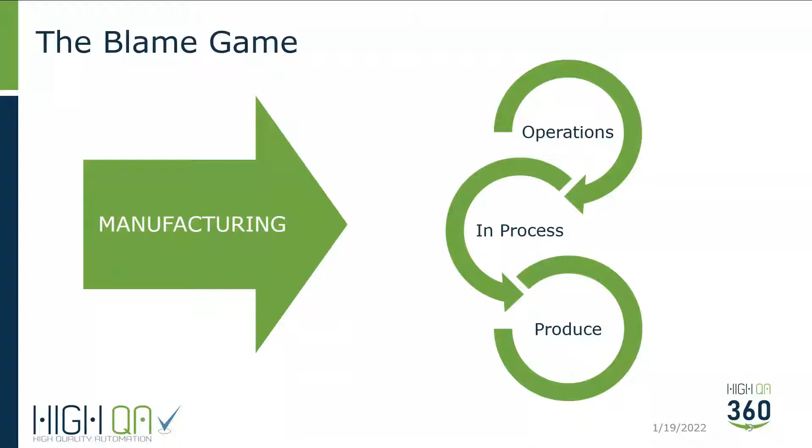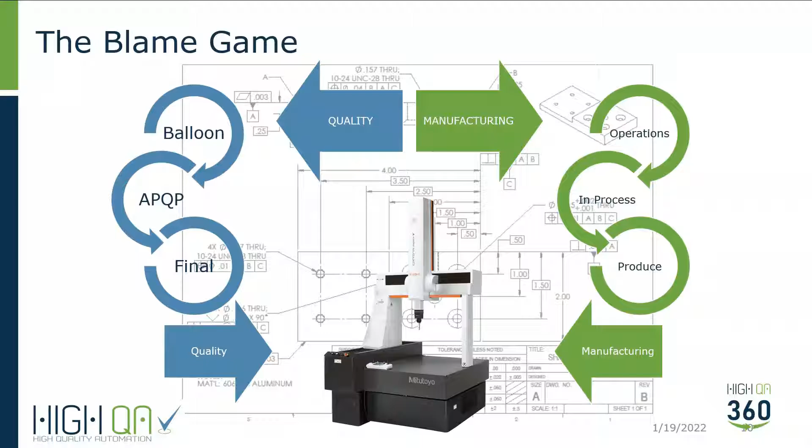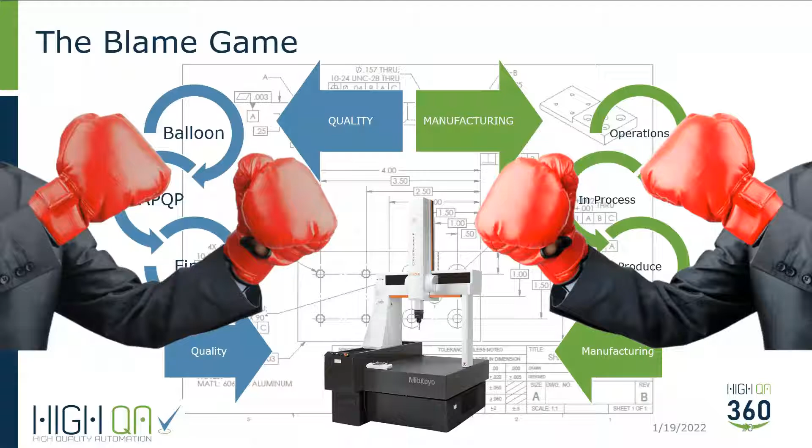But now that the process is outlined and set up, the parts are produced and measured during the process. But then what happens? Well, in our not so made up scenario, the first time quality and manufacturing actually come together isn't until the part has already been measured on the CMM, long after the parts are made and measured in process. And sometimes this produces some potentially heated discussions between those who made the part and those who checked the part. But we find the biggest issue some of our customers have is collaboration between departments, or lack thereof.

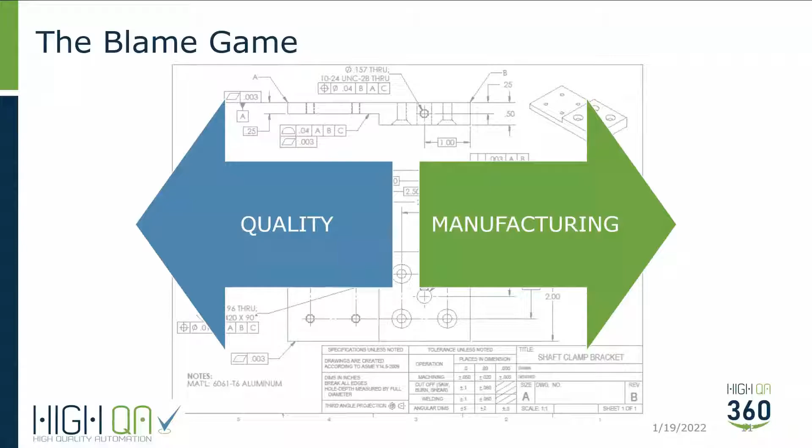What if we could take this scenario and rewrite the process? Let's start with that very same print. The same processes need to be done, right? Only now, as it works its way through the company, the digital thread is staying intact because everyone from manufacturing and quality are working on the same exact information.

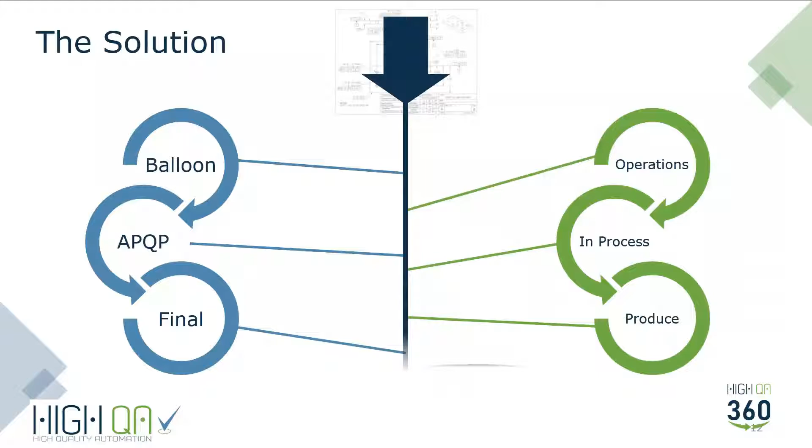The ballooning identifies all the engineering characteristics. Manufacturing identifies all the operations. In-process checks are identified. Data is acquired both on the shop floor and in the quality lab. All the inspection results are compiled into a final inspection report, and a complete submission package is created. Now, this translates into increased transparency within your company and ultimately drastically improved lead times.

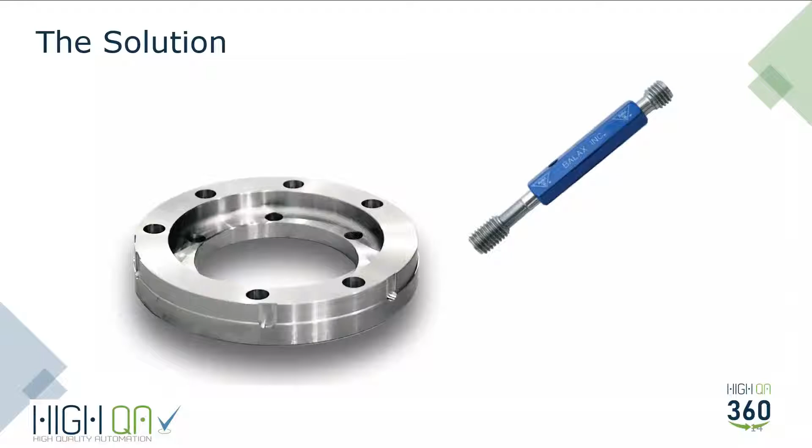Here's one more quick scenario. Let's say you make this part. And let's say these 3 holes here are threaded and finished in the machine in op 30. So the machinist is going to use a calibrated thread gauge to check the holes after they're finished in op 30. Now, most companies will recheck the thread at final inspection. But why? Why not use the data from the machinist on the shop floor who inspected it the first time?

Now, some companies decide to treat the final inspection as a double check, to make sure the thread is good and there's no burrs or anything on it, and that's fine, no problem. But for other companies, the process of measuring something in final inspection that's already been measured on the shop floor is time wasted, and it increases the time the part is in final inspection.

So how do we do that? How do we break the bottleneck to get parts out the door faster without compromising quality? Well, the answer is simple yet commonly overlooked. The process needs to be automated. But when people think about automating a process, visions of robots and auto-load CNCs are usually high on the list. And why shouldn't they be? By some estimations, it increases throughput by up to 4 times. But why has so much attention gone into manufacturing for automation without addressing the true bottleneck, the quality documentation process?

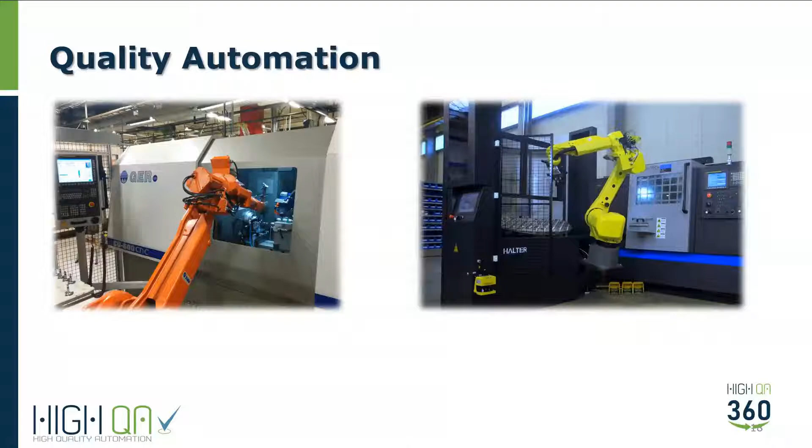So at HighQA, we help to streamline and automate your quality process. Now, this is usually done in 3 phases. We have the planning phase, the production phase, and the reporting and submission phase. Now, for the rest of this webinar, we're going to be primarily focused on the production phase. But as a side note, when we get into the software in just a minute, we're going to be gathering some data and then compiling it into a first article report. We will not be getting into the APQP documentation automation that's available in the software.

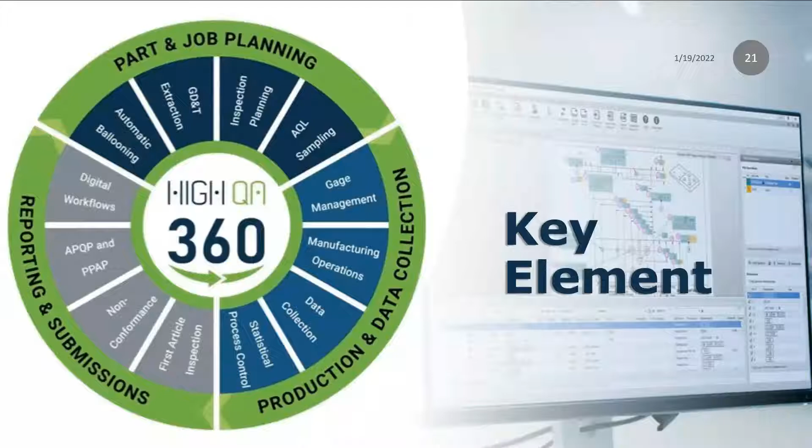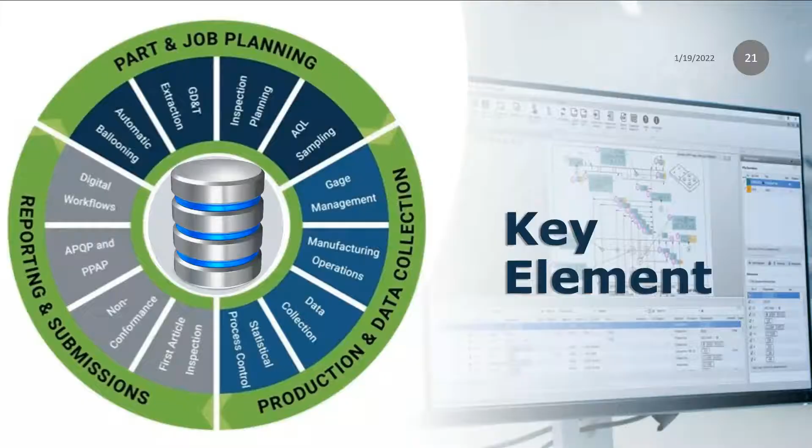But we can never get very far in a presentation without talking about one of our key advantages. That's the database. All the information you're about to see is securely stored in a database on your secured server on your network, and it's available real time across departments. So this is not a cloud-based solution, so you won't have to worry about your data security. It's all kept internally. So let's jump into the software and see how easy shop floor data collection can be.

So for this part, we're going to jump into the software and step you through the process of how you would actually do this at your facility. And it all starts with the planning phase. We can't get into production without part planning. So we're going to just simply open a new drawing.

We have a sample drawing here that we use. And once that opens, you can see this is a PDF. Now we can use any pictorial-based drawing, a PDF, a TIFF, a JPEG, or whatever really you have that's a picture type drawing. Additionally, we do have the functionality to bring in a 3D model with the PMI data. So we have that as well. But from here, it's just a regular 2D print,

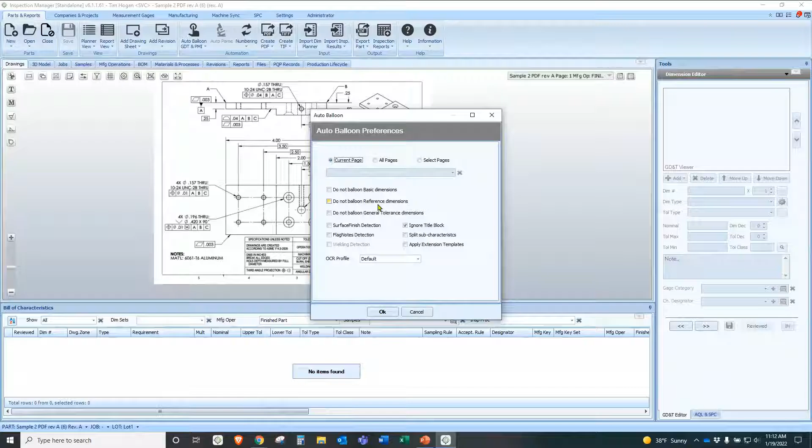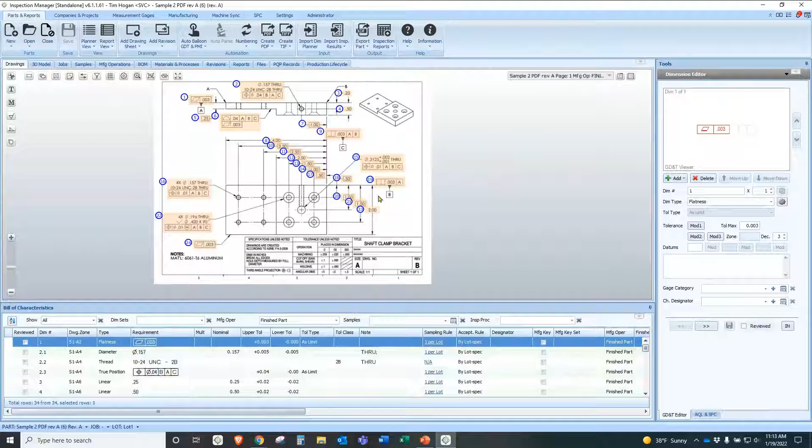nothing special about it. We're going to click on our auto balloon button, our single click auto balloon. There are options here for multiple pages, and you can turn off basic and reference. But for this case, in this demonstration, we'll just hit OK and let it run through the process. Now the proprietary OCR takes over, optical character recognition. And it's looking at this print, specifying what is a GD&T and what are dimensions, and analyzing that entire thing. So you can see that took about 15 seconds, and the entire print is now ballooned.

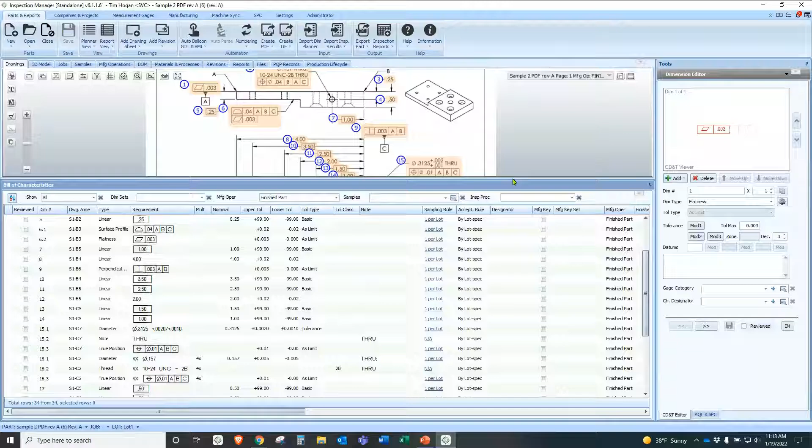But even more importantly, if I look down here in what we call our bill of characteristics, all the information has already been extracted and populated in the database. This is all in the database real time. Nominal information, tolerances, the characteristic themselves, what it is, the drawing zone that the dimension is located in. All that information was all extracted in that first 15 seconds.

So now we have our information, and we can also acquire additional information off the print. For example, here's our material. We can come over here and click our material button and simply select it by box selecting it like this. And if we look to the right over here, we can see that our material has now been populated. We can click on our little pencil right here and add additional information like material codes, spec numbers, cert numbers, supplier list. There's a pull down for that, and you can add a supplier just by simply clicking this add new.

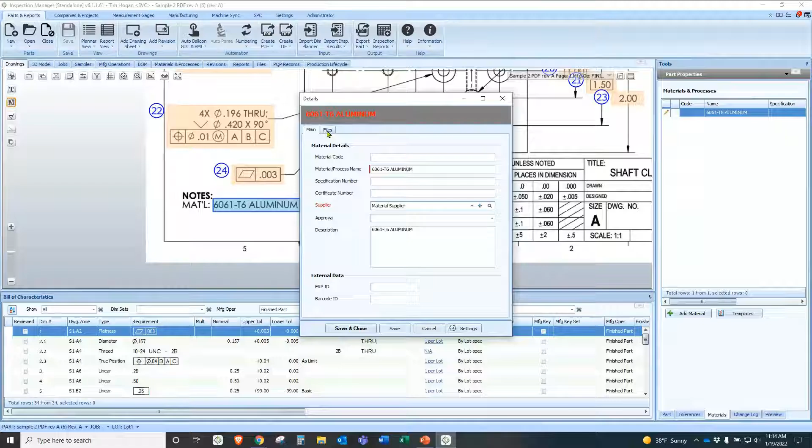A lot of our customers come over here to files, and they'll include a certification for that material. And once I hit save and close, now that certification and the information is all stored in the database and associated with this part record.

But we also have a couple creature comforts that I'll point out to you as well. For example, let's say it missed a dimension. We don't claim to be perfect. It is going to miss some every once in a while. So let's say this was a really busy print. It's hard to identify sometimes some of the characteristics it's missing.

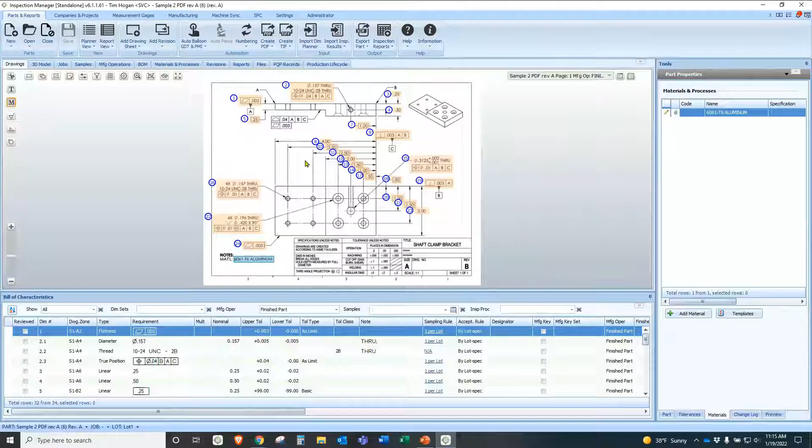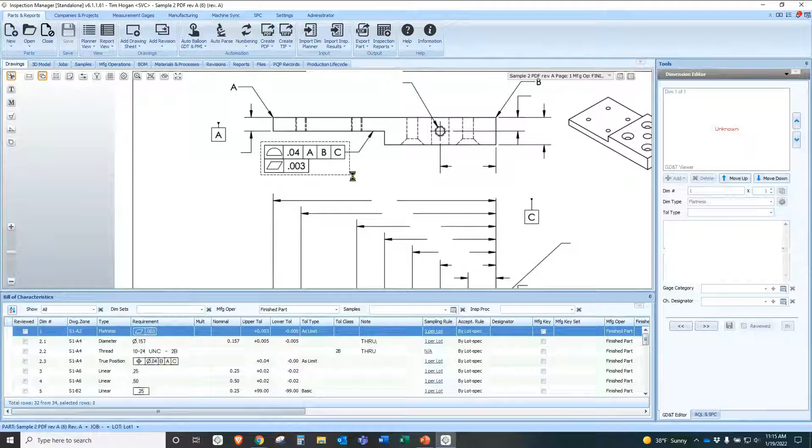We have this function over here called whiteout dimension. If we click on that, it whites out everything that it did get. So now we can easily see features that it did not get. And if it did not get something, we have a manual clipping tool right here with the little scissors. And then it's simply a box select. We'll box select it just like this. As soon as I let go, it's automatically parsing it and analyzing what it is and populating it over here.

We'll go toe to toe with anyone for our OCR technology and how it analyzes GD&T. So please feel free to test us out on that, and anyone else as well.

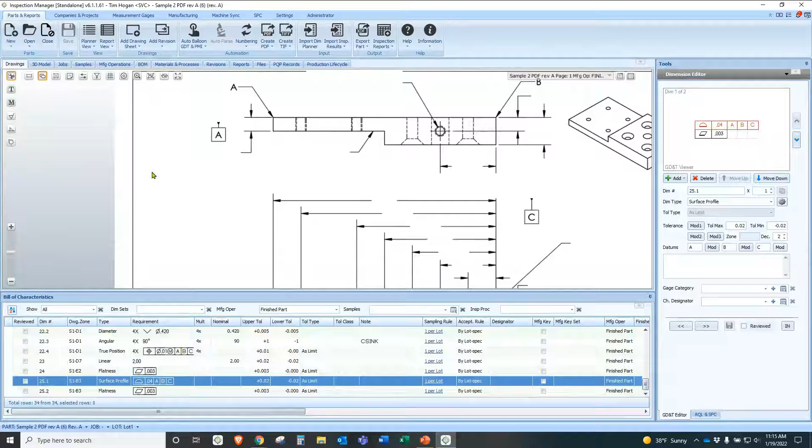So it has all of that information, and once we click away, now we can see that it has all the dimensions, and we can turn off the whiteout, and now we have all of our dimensions listed. Now we're out of sequence, right? Because we deleted the number 6 and then we added another one. It's not going to automatically populate number 6 because it doesn't know if it should or not. So we can simply come up here to renumbering, and it renumbers it, puts it back in order, just like we'd like.

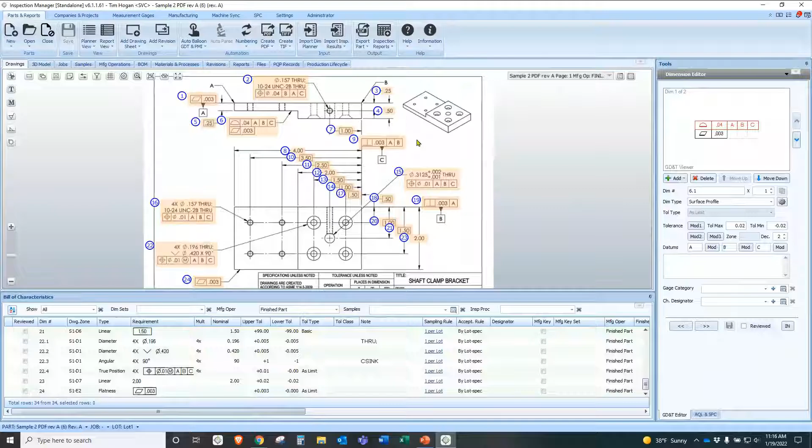And by the way, for those machine shops that are listening that have to convert from inch to metric or metric to inch, sometimes you'll get a metric print, for example, and then need it to be converted to inch out on the shop floor.

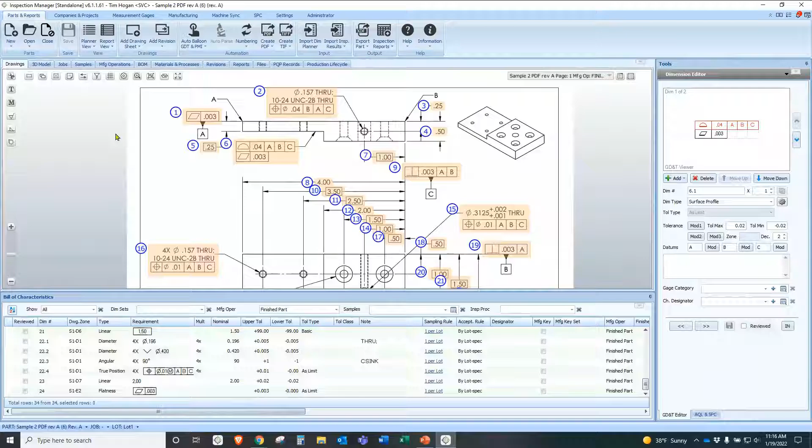And the magic of 25.4 on a calculator is revealed, right? We also have this little convert button right up here. You simply click on this and it converts the entire print over to the other unit. Whichever one you're using, it'll just use the other one. So this is a very, very simple way, and you can print this out as well, to communicate the alternate dimensions for the shop floor or for your customer if you need to.

Now, so you're aware, you can change the number of decimal places in this as well. So that's all customizable. So wanted to show you those couple features. In addition to that, also wanted to point out that if there is a dimension, like this is a plus dimension, for example, we can look over here and see that it actually pulled the plus tolerance correctly.

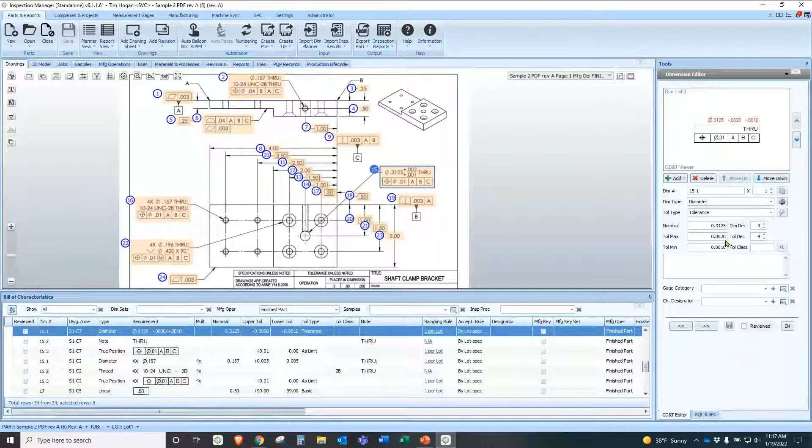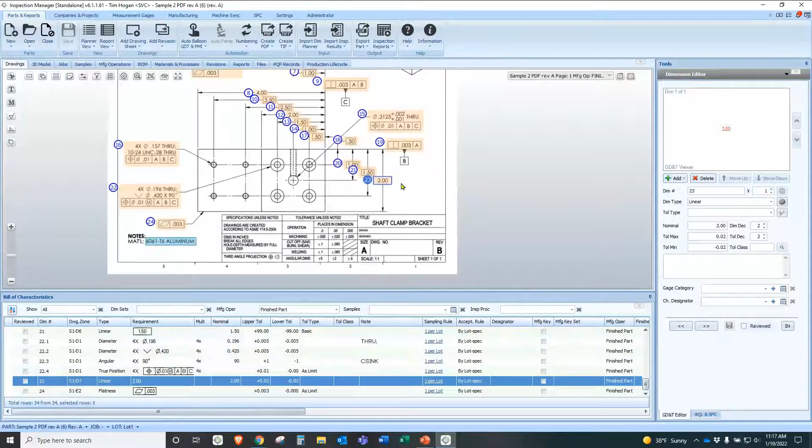But if there is not a tolerance listed like this one, it will pull it from a tolerance table, the tolerance table that's located here. It's predefined and then it uses it. But again, if there is a tolerance, it will override that. Okay. So also, let's zoom in on this a little bit. Also wanted to point out different options here for gauge category and characteristic designator. Keep in mind, we're still in the planning phase, still in the planning process.

What we're really doing is we're trying to streamline the downstream effects of measuring the part. So by selecting gauge category and saying, hey, I want to measure this with a blade micrometer or whatever it could be, caliper or what have you. And let's say this is a KPC or a key characteristic or a flight safety or something along those lines. And by the way, there is a plus sign here. You can add whatever designator you have. Maybe it's a CTQ for medical or whatever. Let's say it's just defined as a key characteristic.

Once we hit save, a couple things happen. In our designator column, we now see it's a key characteristic, and we can sort our bill of characteristics down here by designator and just have it note that. Additionally, we have it set up in the software in this version to automatically update the sampling rule if it's a key characteristic. So now it's saying, okay, I want to be based on an AQL table as opposed to the default. In this case, the default is 1 per lot. So you can set up rules to automatically do that.

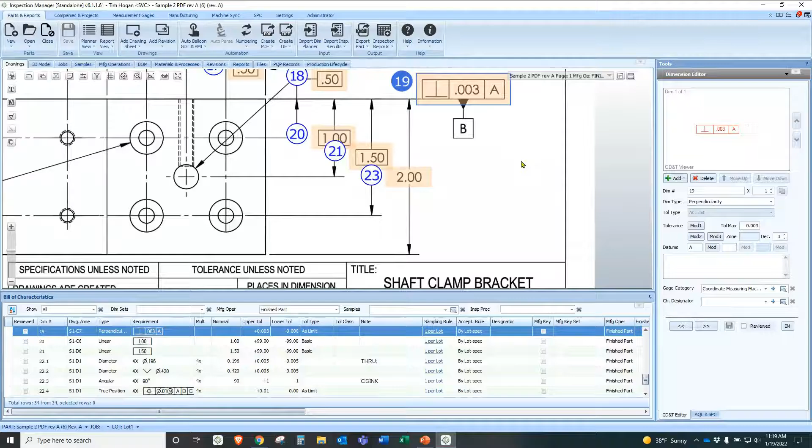In addition, you can also set up different kinds of rules. For example, let's say the perpendicularity that I just selected here. Let's say for every perpendicularity, you want it automatically set up for a gauge category of coordinate measuring machine. If you set that default up, next time you balloon a print and it's defined as a perpendicularity by dimension type right here, it'll automatically populate your gauge category to coordinate measuring machine. So you can set up certain defaults to that as well.

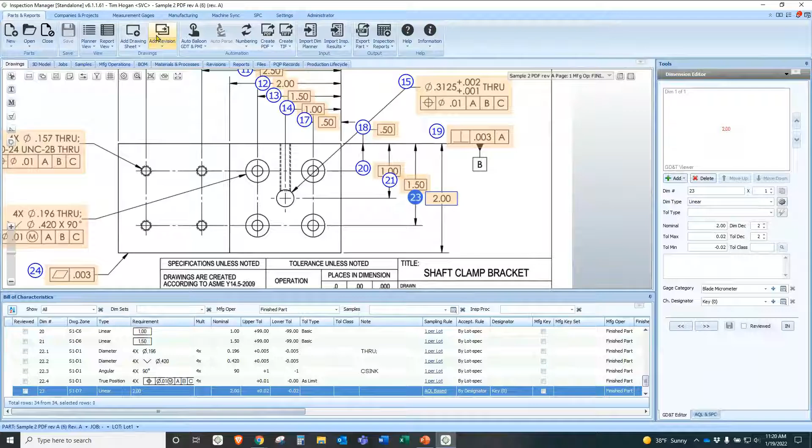And also, if you're using a different software, or, like a lot of our customers, just track it by an Excel sheet, we can import that and bring it right into High QA. So you're not having to duplicate it. You're not having to re-input them one at a time. We can simply bring your list in completely.

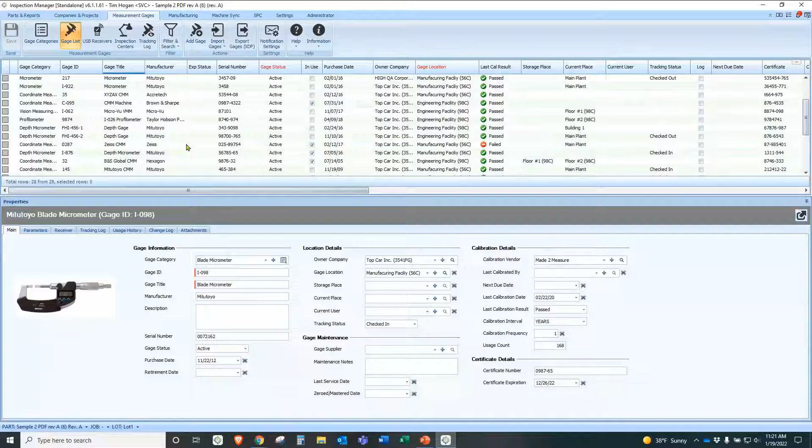But one thing that we do have that we don't believe anyone else does: if I come down here to this thread gauge, for example, and I'll come down here to the bottom and say usage history tab. So if I click on my usage history, I have full transparency of every dimension that this gauge ever checked, right down to the job number, the lot number, the serial number, what dimension it was, what specific dimension it was, what the call out was, and whether it was a good or bad part.

If we scroll over here, we know by login who measured it, the time and date stamp it was done. If it came from a specific machine, you can put that here. If it's tied to a non-conformance report, you can put that here. All the information is stored in the database. And now, because we have the dimensional information, we have the gauge information, now we can start correlating those and making sense of them. Where this becomes really, really powerful is if you had maybe a dropped gauge.

Let's take that thread gauge, for example. Thread gauges are notorious, right? You drop them, get a little burr on the edge or the lead, and it's always the lead edge, right? But let's say it was bad and it started checking parts incorrectly, and we started failing good parts. You can come back here and see where it started to check parts incorrectly. And now you have a great reference for quarantining parts and then having to go through and remeasure them if you need to. Saves a lot of time.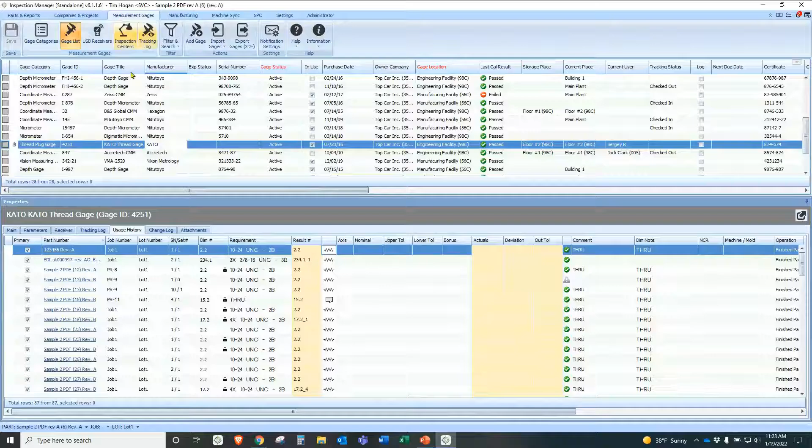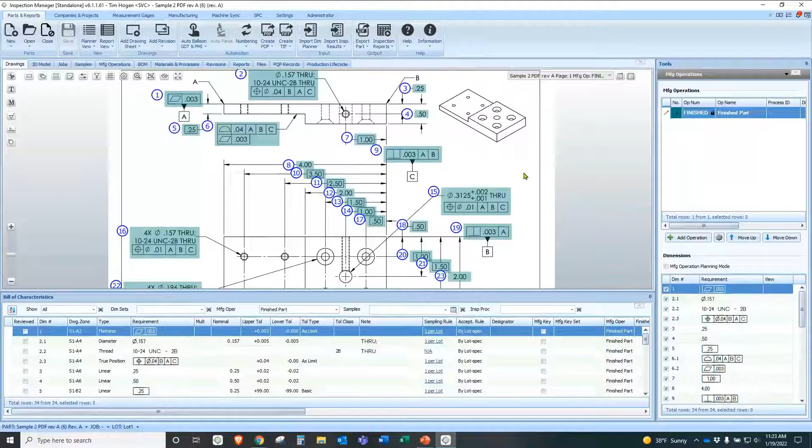So we'll revisit this too when we get to our shop floor interface, but wanted to show you that as well. But let's jump into the manufacturing side. So most of what we've done so far is pretty much on the quality side, but here's where manufacturing will really get involved. Let's go up here to part properties and come down here to manufacturing operations. In manufacturing operations, this is where we're going to identify what dimensions are going to be affected in what operation.

For example, let's say we're just getting a blank of aluminum for this, and we're going to rough it in Op10. Well, let's say we're just going to make a blank of the outside in Op10, and it's a 3-axis machine. We're just going to do the overall width there, there's a little step distance there, and the overall length, and maybe the overall height, and maybe this little step height right here. And let's say that's going to be our Op10. We come over here and simply click Add Operation.

And now we have an operation added, and we have multiple colors here to define multiple operations. And you can add as many as you want. You can box select them like this and say, I want to add that operation. And it changes it to a different color so you can easily identify what dimensions are affected by what operation.

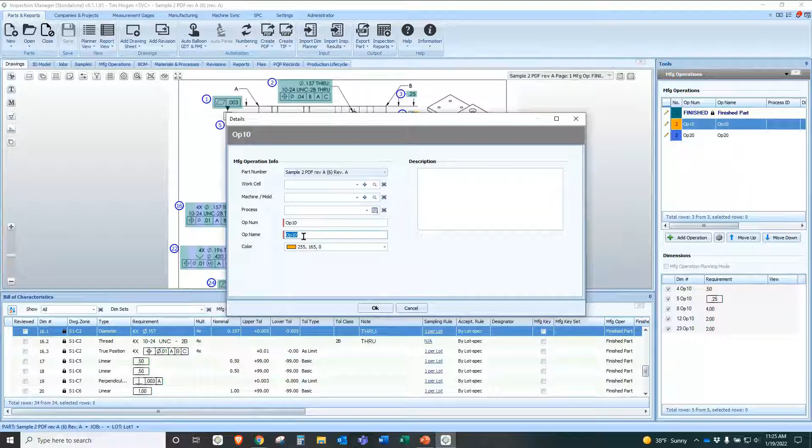And for Op10, for example, we can click our pencil again, and we can put in here if it's associated to a specific work cell, if it's associated with a specific machine, a process. We'll get into the process in a couple of weeks when we talk about our APQP documentation automation. But we can also just define this whatever we want to call it. Just call it the roughing operation, for example, and hit OK. And now we look up over here, and we do have our roughing op is our Op10.

In addition to that, we can come down here into our bill of characteristics, and we see we have manufacturing operation. We can select right from here our roughing op. And now for those customers that create in-process sheets for their specific operations, we just did that. But more importantly, we didn't change the numbering sequence of any of the numbers. They're still the same numbers, and so they can be correlated to the final inspection. So now we have an in-process print.

We can also come down here, because I'm going to select all of these. Because why? Well, in a roughing op, you're not going to machine it to the finished dimension, right? You're going to leave some stock on there for the finishing op. So we can come in here for only this operation, and we can update the nominal value. Let's say we want to add 20 thou to this value. We can add, subtract, we can go by percentage, whatever you really want to do, we can do here. We can change tolerances.

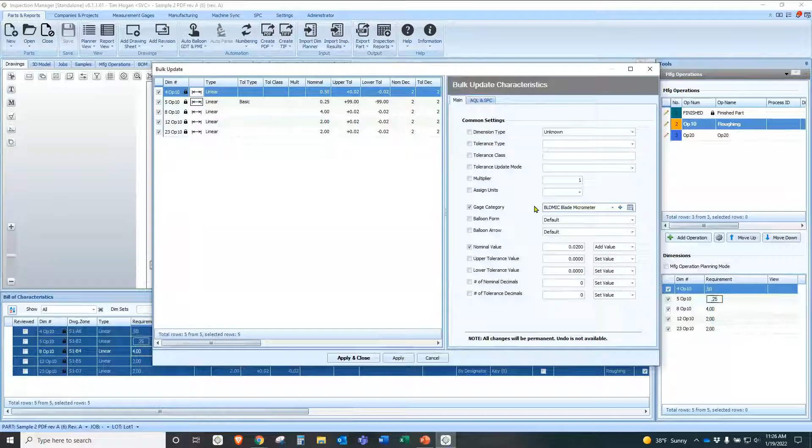We can even assign gauge category for this operation and say, hey, I want to measure this with my blade micrometer or whatever it is. Caliper, you can change dimension types. You can change anything you want, but you're only changing it, again, for this operation, not for the final.

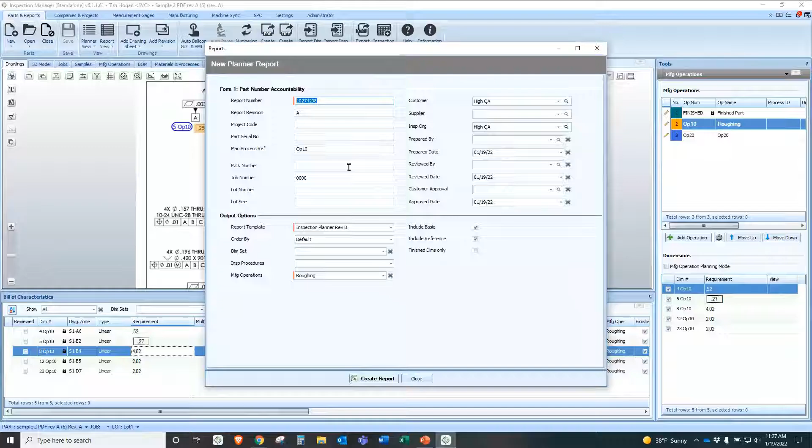Once we hit apply and close, now if we look, all of our nominals have been adjusted by that 20 thousandths. So that's the new nominal, but just for this operation. We can also come up here to inspection reports and click on inspection planner. And you can put whatever template you want right here. This is just a generic template that we have.

And now here it is in Excel. This is just simply an Excel spreadsheet. We get a lot of questions. Well, can I change it? Can I do anything? It's in Excel. You can do anything that you can do in Excel. But you'll see that this is only for Op 10.

And here's our updated nominals. Notice the 20 thousandths has been added. Identifying them, what we want them to use for, again, the planning process. This one is our key characteristic that we had. And now they can just simply enter this information in.

Well, now we want to start switching gears a little bit and start talking about bringing information back into Inspection Manager, right? We want the actual information to start getting us actionable information. So this is one way to do it. This is probably the hardest way, but for some shops, it's a great place to start because you could just enter information here, and then we can pull this Excel sheet directly into Inspection Manager and populate the actuals. So that is one way to do it.

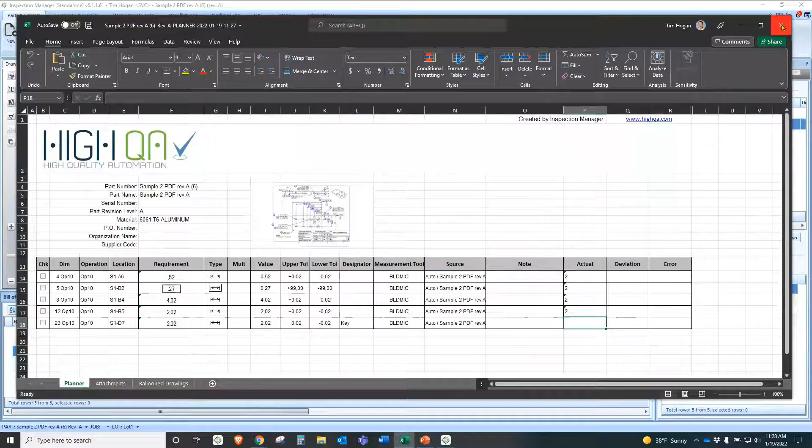There are two other ways that we'll go through very briefly here. And I'm just going to kill this and say don't save. What we want to focus on mostly here is our shop floor interface. So we have two different shop floor interfaces for gathering data on the shop floor. One is called Explorer and the other one's called Express. And I'll introduce both of them to you here.

Generally speaking, Explorer gives you more information about every job, and Express limits what the user can see, so they only see what's assigned to them. So it really depends how you want to run your shop floor. Also notice scan badge right here. We can have it scan badges so they can log in that way if you happen to have a badge-based system in your facility.

So a few things I want to point out here. This is just the home page for the Explorer. Firstly, we notice we have a gauge button here. Well, before I get into that, let me just introduce that this is an extremely lightweight application that runs in Google Chrome. It's simply browser-based.

This is going to an IP address. You can see it right up here, but it's going to an IP address in your intranet. It's not going externally. It's not hitting the web. This is just an IP address internal to your server, so that way it knows where to populate the information. But a lot of our customers will use just a tablet for this. And because it's just browser-based, they can just pull up an IP address. So it doesn't matter if it's Apple or Windows. You can use pretty much any tablet.

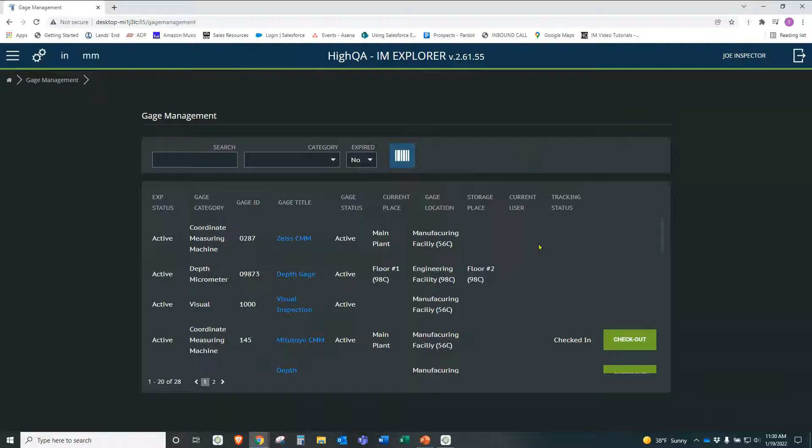And this is the full gauge list that we saw in Inspection Manager for our gauge library. And we can slim it down to what we want to see here. We'll use that ever popular blade micrometer. And now we can see we only have one. So if I want to use one, it's this one. And if I want to go grab this from its location, I simply click checkout.

And now here's part of the neat thing about the database, right? Because it has most of this information already populated. It knows the gauge ID, the tracking status, the location, it knows all of this information. I'm logged in as Joe Inspector, so it knows who's logged in, and it's assuming that I'm the one checking this gauge out.

And then I just have to say where I'm taking it. I'm taking it to the main plant, and I say check out. And now immediately, the current place has been updated, and the tracking status and the current users have all been updated. And then when I want to bring this back, I simply click check in and say return to storage, and it puts it right back into the storage location that's defined in the gauge library.

So all of your gauges, if you ever are looking for a gauge, or if you have any lost gauges or whatever, this is a very good way to track your gauges in your facility. But going back to the home screen, the two that we're going to be focusing on mostly are right here, because that's where we enter data into the database. But I did want to point out, we do have a scan barcode.

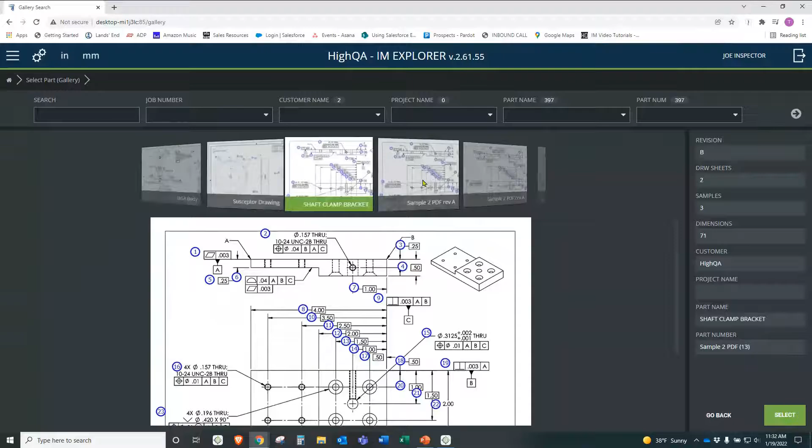So we can go into gallery search here, and we can just see that we have different prints here. Anyone used to an Apple product that has pictures? It looks very similar to that. And all we have to do is go through here and pick out the part that we're using. Are we using this part, this part, this part? We can also identify it by customer name, project name, part name, even job number.

We can come down here and select, oh, I'm on job number 63. Oh, here's my part for job number 63, the one I was using. And now I can simply click into here, and it gives us a great dashboard to know, okay, how am I doing from a completion standpoint? Are any bad? Are any failed? And now I can go into this job and then into these samples themselves. And we have different dashboards for each step of the process.

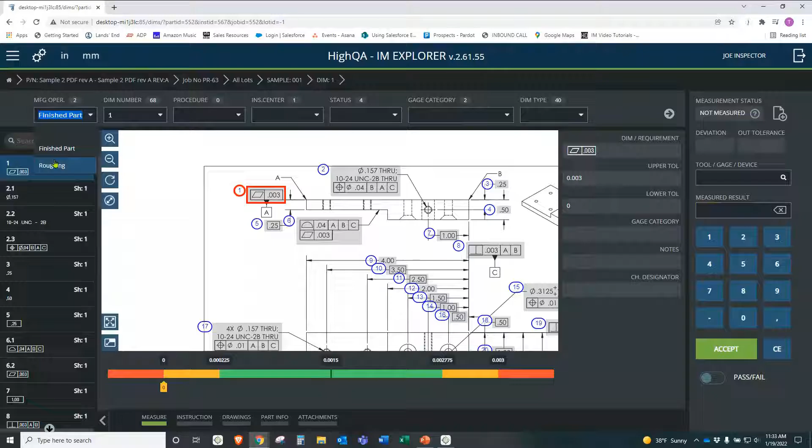So once I go into this part, now this is the final inspection. I'm going to delve into this a little bit deeper in just a couple minutes. But I did want to point out here that we can go into our roughing operation. Notice our manufacturing operation up here. If we just go into our roughing operation, now I only have the dimensions that were defined in that roughing operation. And now here's where the data starts to come together, right?

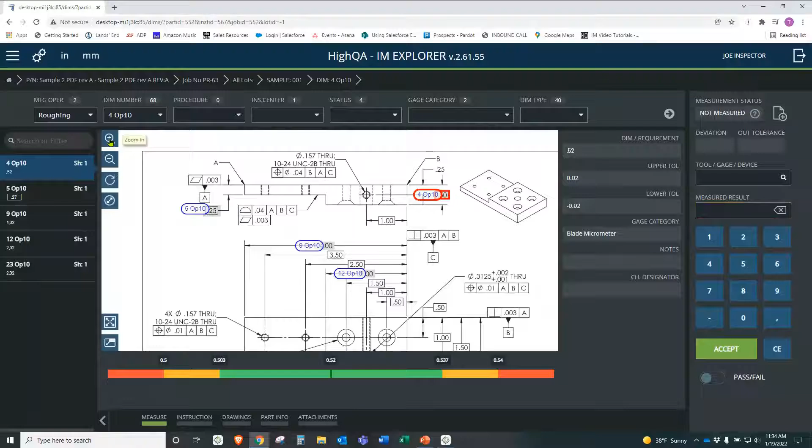And as a side note, this is very lightweight and user-friendly. You can pan this around. You can zoom in and out if you need to. You can change the look here if you need to. What some of our customers really like is this little bar down here at the bottom. What this does is say, hey, this is your nominal, this is where you're in spec, and this is where you're out of spec. Instead of doing the math in your head very quickly, it shows you right here. This was kind of surprising to us because we thought it was just a neat thing, but we find a lot of customers really like it and use it quite a bit.

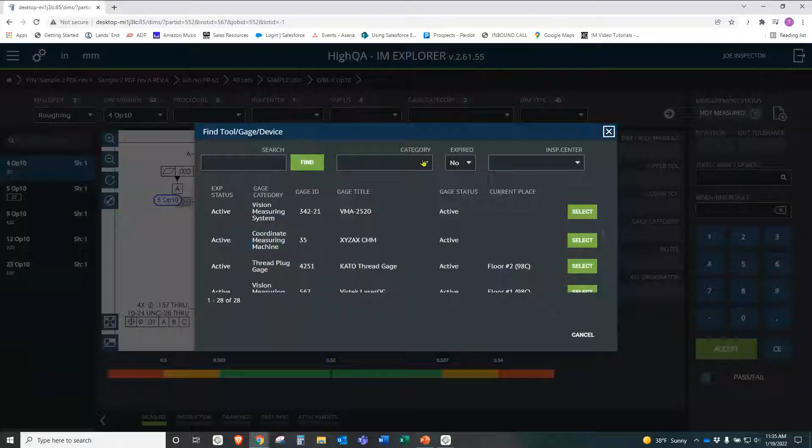But then we just come over here, and I'll tell you what that is in a second, and we select the tool that we're going to use. Now, this is where the planning phase streamlines things downstream, because in the gauge category, we selected blade micrometer for Op 10. If you remember, we did that a couple minutes ago. Now that we selected that, I'm only seeing a list of blade micrometers. Whereas if I didn't select that, I'd have to weed through here and try to figure out where my micrometer is, what I'm using for this. So this is a good example of where the planning phase can help streamline things downstream.

Also note here that it says expired no. This will not allow information to be entered if the gauge is expired. So it also helps to make sure you don't get erroneous data in your database.

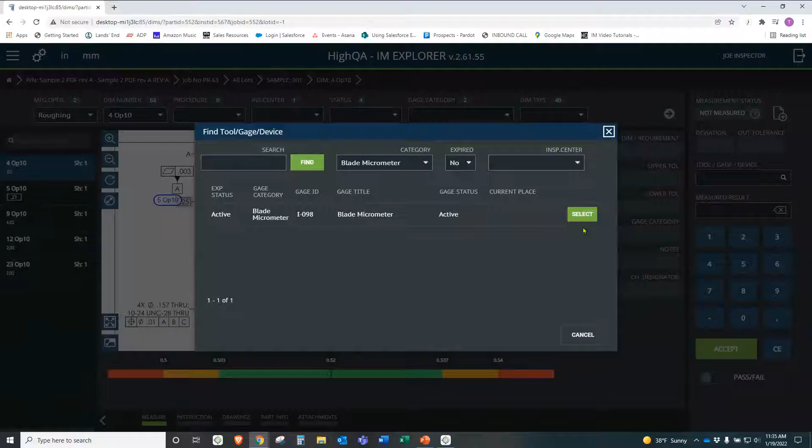So we have this blade micrometer, and we can say, I'm going to use that. And now that's our gauge. Now, if you can see, this is actually blinking. It's blinking orange right now.

Well, it's listening. If you happen to have any RS-232 outputs or wireless or Bluetooth gauges at your facility, it's listening right now. For example, I'll hit control, and that's what was in here before on my keyboard. And now you'll see control on here. So it's just listening for information. Now, you don't have to have that, of course.

You can tell that the keypad here is set up for a touch screen. And on a tablet or a PC, you can simply enter the information in. If you have 0.5, let's say it's 0.51, we'll hit accept. It turns green and then automatically goes to the next one and prompts them for the next one. They don't have to, they can select any one they want.

But let's say it retains the same gauge because it assumes if you have one, you're going to keep measuring it. But let's say, for example, we had a go, no-go gauge for this. Okay, so it's attribute data, and we're going to measure it with that. Out on the floor, even though it's looking for numbers, right down here, there's a pass-fail option. If we simply toggle that, it changes our measured result, and we can say that's a good part, it passed.

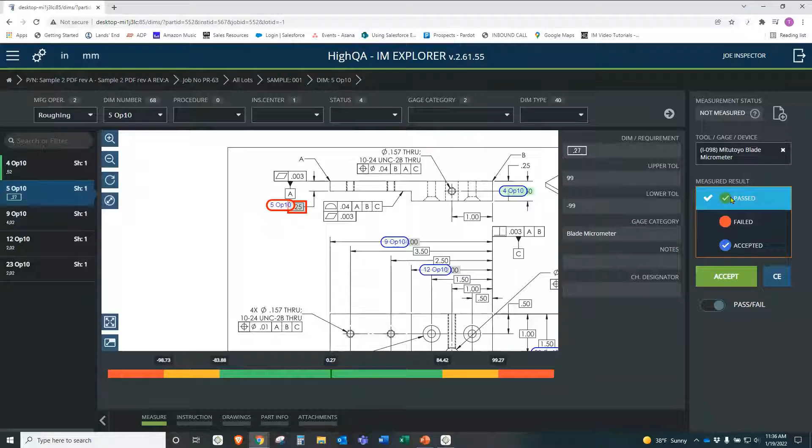Okay, we could change that because that's not the tool we're using. And then we hit accept, same idea, it turns green and prompts right to the next one. Now, let's say this measures 5. And then we hit accept. So it's a bad reading, right?

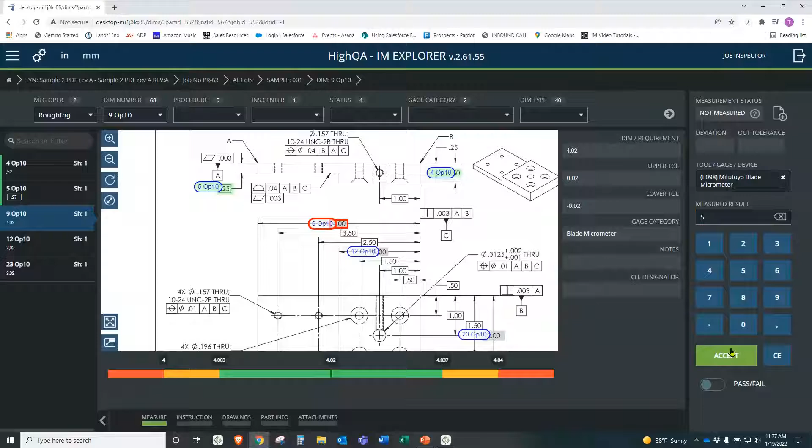So if it's a bad reading, it'll automatically pop up and say, whoa, wait a minute here. This measurement is out of tolerance. Would you like to measure it again? And if you click on measure again, you can enter the information in just like you did the first time. Hit accept, the same prompt comes up. But let's say it really is bad. And we say keep failed.

Now it automatically prompts us to start a non-conformance record. And we can simply click on add new. And again, the power of the database, it has all of this information pre-populated. It knows the job number, who's doing it, date, timestamp. It automatically assigns a unique non-conformance number. If it's associated with a machine or work center or an inspection center, you can put it here.

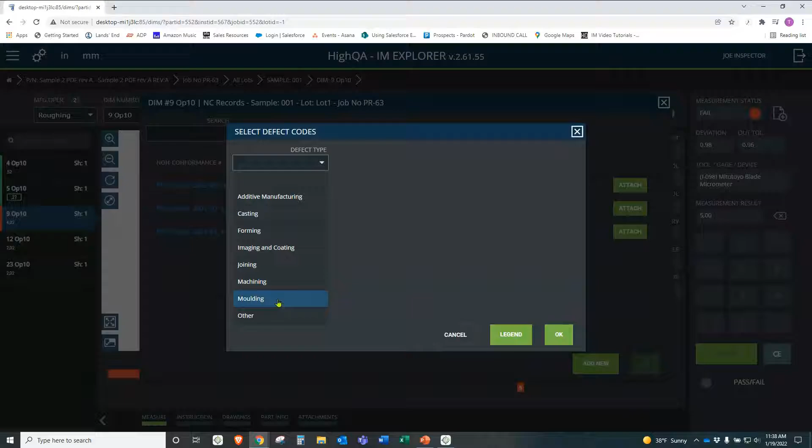You can put any comments you'd want to, and then the status. Hey, it's a scrap part. It was bad. Now we have a defect code we can put in here and say, oh yeah, this is from, let's say, machining. And we hit okay. Now that non-conformance record is in the system and in the database. We can also set it up so notifications can be sent by email for non-conformances.

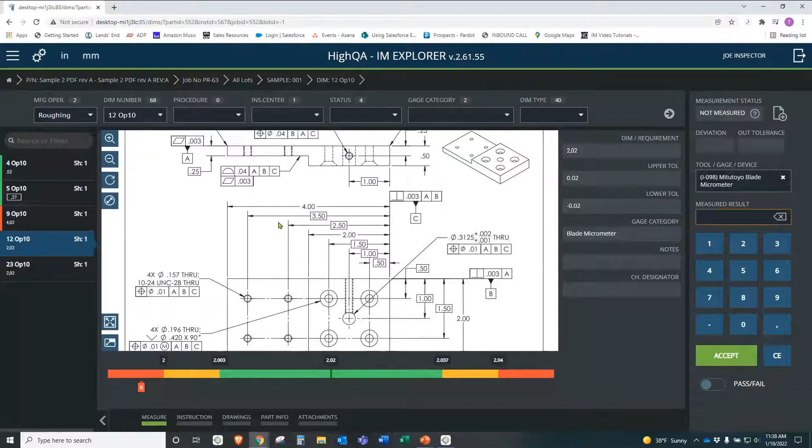So all of that information is captured, and we can also tell it turned red here, kind of pinkish, but red nonetheless. So that's Explorer. One thing I wanted to also show you, since we're here together, is the Express, to give you a flavor for the differences. And you have to log in here just like we did before. And please note, again, scan badge is right here. So you can simply scan a badge in.

Log into Express. You can see right away it looks different, right? There's not as much information. And since I'm logged in as Joe, I can only see the jobs that are assigned to Joe or Joe's in what we call an inspection center. So we're simply going to select this because it's the only thing I can select because that's what's assigned to me. And same here. And now I have two different parts.

Here's our samples right here. We have sample 1 and sample 10. And I can see that sample 10 is already inspected. I need to select this one. And now you can see the same kind of flavor, but different. Just a little different, right? It's slimmed down. There's not as much information. There's not as much entry.

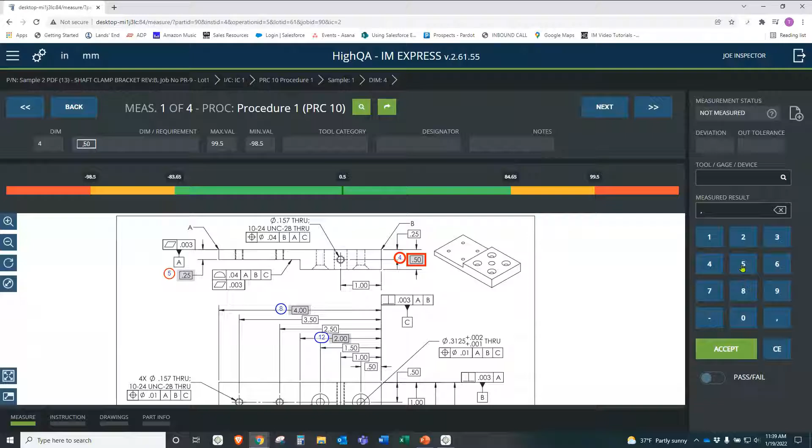However, the same thing holds true. Enter the information here, click accept, prompts me to the next one. Enter the wrong information. The same prompt comes up, and the same nonconformance is also populated as well. So it has a lot of the same functionality, but it just depends if you want to slim it down for some individuals as opposed to others.

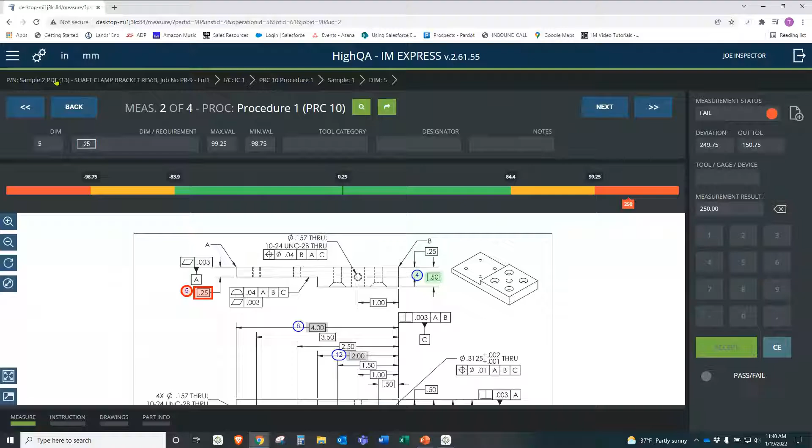And there's just a little bit of differences in the planning phase to figure out which way to go with this. So I wanted to show that to you as well, so you're aware. We're not going to get into it during this webinar. However, we do have SPC associated with it.

And we also have PQP Lite, which we'll show you in a couple of weeks. But you can have shop floor statistical process control to where you can see real time if you're in control, out of spec. We have automatic notifications for out of spec conditions, things of that nature as well. And that information can be put in right on the shop floor. But now I just want to show you how we can bring that data together.

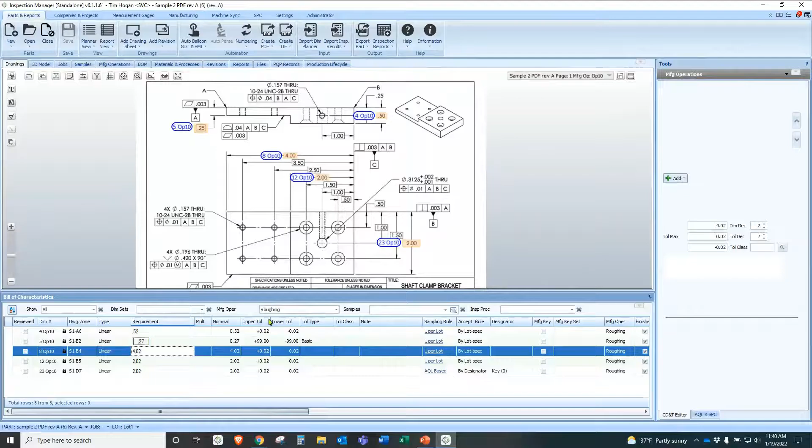So in Inspection Manager, I'm going to go back to where we were before. Let me switch and go back into Explorer here. I want to show it to you this way first. We'll go back into Explorer and then go back into our job. Okay. And our part here. Now, this part I have preset up. It's the same part, of course, but I wanted to paint a picture for you a little bit.

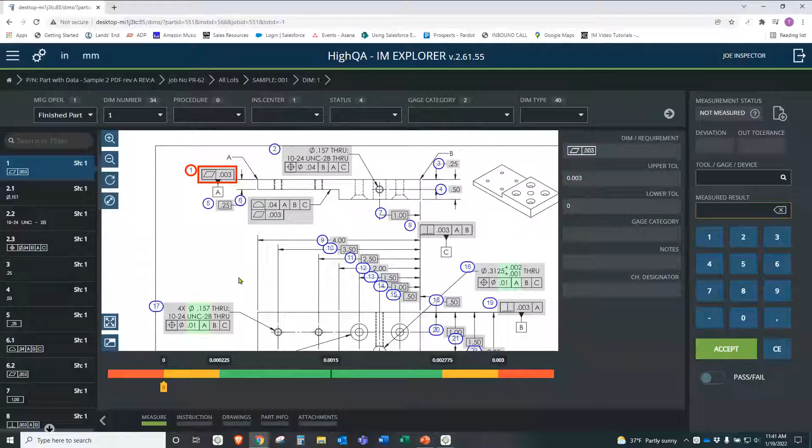So we talked about before, here's our manufacturing operation. This is only the finished part, right? So this is the complete finished part, but I'm on the shop floor. Now, if I'm on the shop floor and I'm measuring something, I can enter it right in here. For example, I'm measuring this thread. And here's my thread, here's my characteristics over on the side over here. If I simply select that thread, now I have information here I can populate.

I can say, okay, what gauge am I using to measure this? Well, I'm going to use a thread plug gauge. And I'm going to select this one. So I have my gauge list here. And is it good or bad? And I'm just going to say, well, it's a good part. I measured it, and I'm going to hit accept.

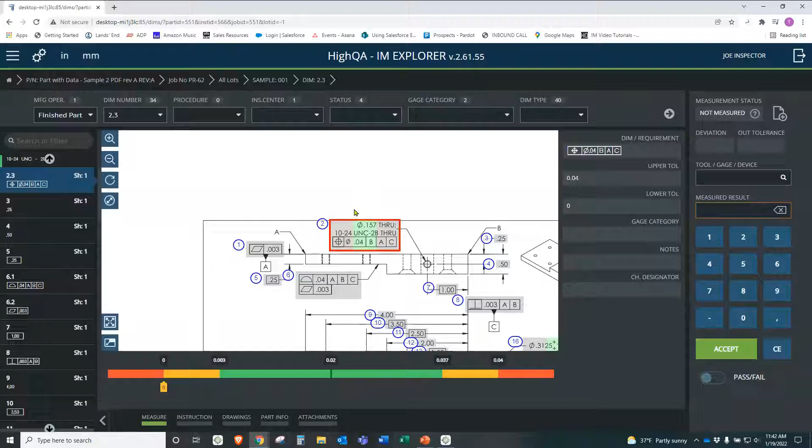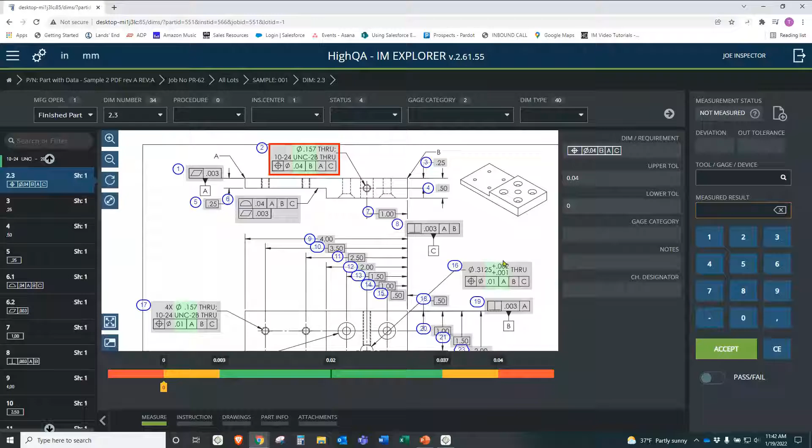Now you can see the middle section. This is broken up in threes because there's three different callouts here. There's a diameter, there's a thread, and there's a position. So the first section over here is for the diameter, the second section for the thread, the third section for the position. So I have information now for this, right? I've pre-populated this for the sake of time. There was a manual callout here for this through hole, and then a manual callout here for these threads here. So those are done already.

Well, now when I go back into Inspection Manager, I'm going to open that same file. And by the way, so you don't think I'm kind of hiding anything, we have job number 62 here, right? See that right there, job number 62. So when I go back into Inspection Manager, I'm going to open right here, we have job number 62. So I'm going to open job 62.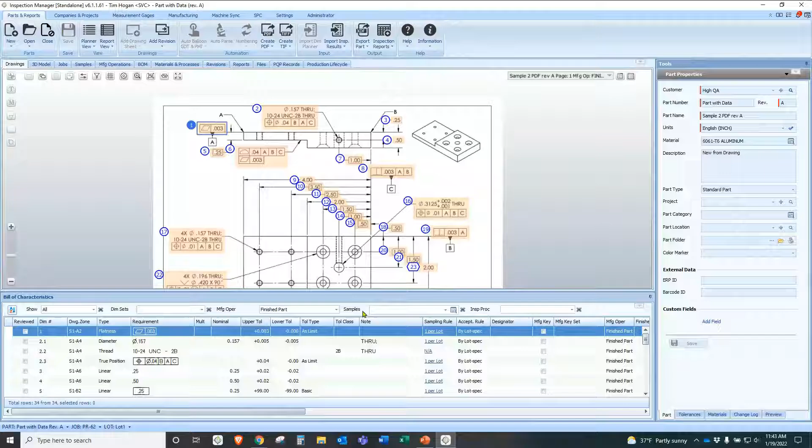And now when I come down here into the samples tab right here, I can click on here and see my sample information. And this is the same exact information that you saw on the shop floor. I have information for all of my manual checks. But now what I'm about to do, you really wouldn't have to do. I'm going to simulate bringing in data from a CMM. And we're going to bring it in from a file, but this would be done, again, automatically in the background.

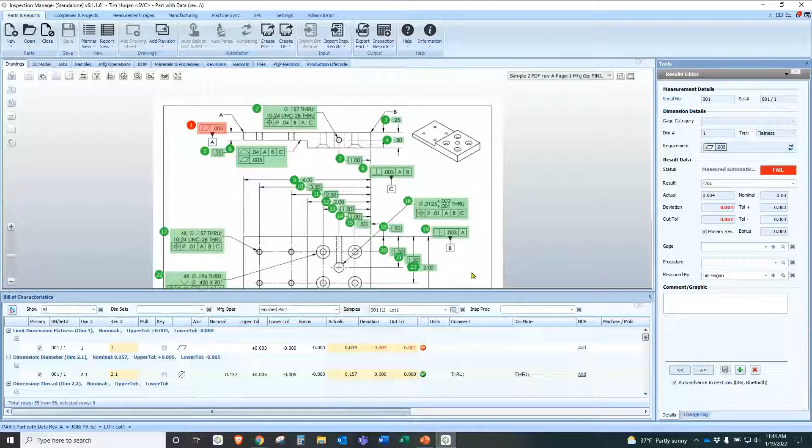Here's all of the raw data from the CMM. And we're just simply going to say we're going to associate it with this sample number. And once we hit import, now it's going to merge the data from the shop floor along with the CMM data. And now we have a complete print that shows our actual information right on top of the print, right over the nominal information. And we can see that this came in bad. We can easily see what's good, what's bad, what's out of spec condition.

And if we just simply come up here to inspection reports and click on single piece report, and please note, we can have multiple piece report. You can create your own reports. You can import your own report templates, as many templates as you want. Because once we click on single piece, right down here, we have to select the template we're going to use. We just happen to be set up for an AS9102 report right now.

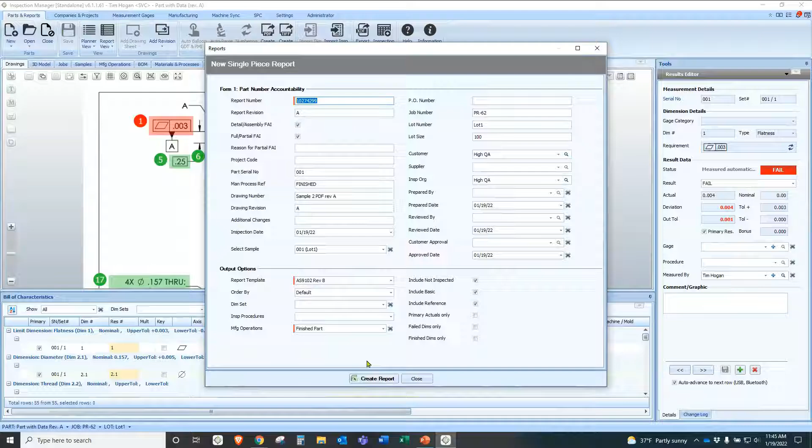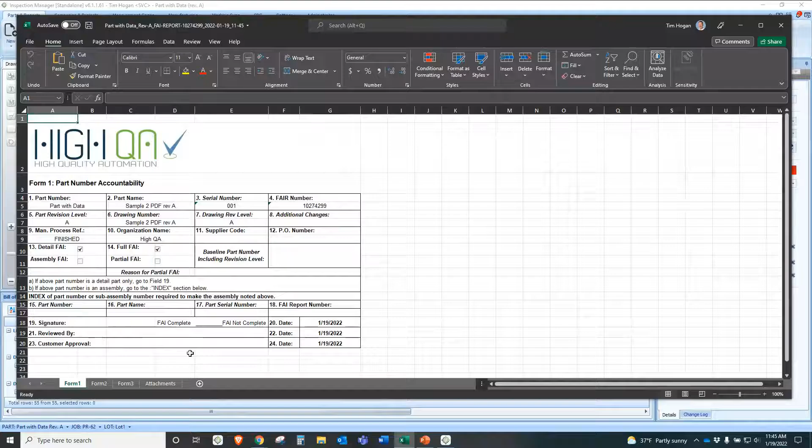And once we hit create report, it's going to generate all of this information and take it over into Excel and generate our Form 1, which has all of our basic information, as you know. Form 2, which has our material right here. And then Form 3, which has all of our dimensional information. Notice that the 4 times are all spelled out 4 ways.

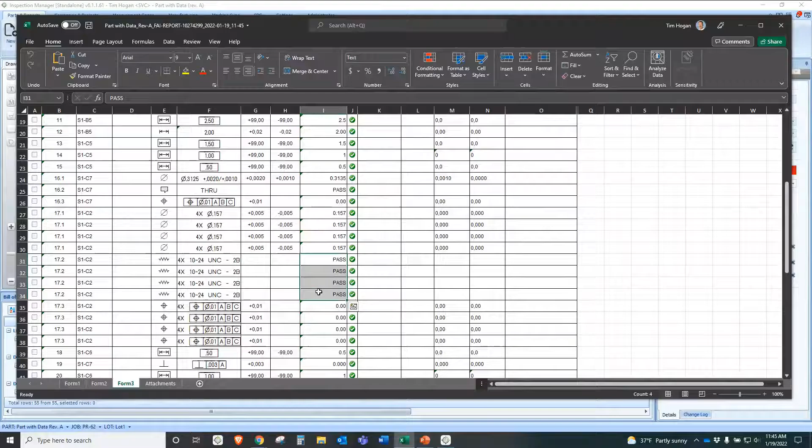Here's the information from the shop floor that we populated. Here's the thread from the shop floor, but here's the information from the CMM. So we've merged that data together so you don't have to re-enter it or recheck it as you go. So that is the main way we have to streamline the inspection process and how we can bring all of that data together.

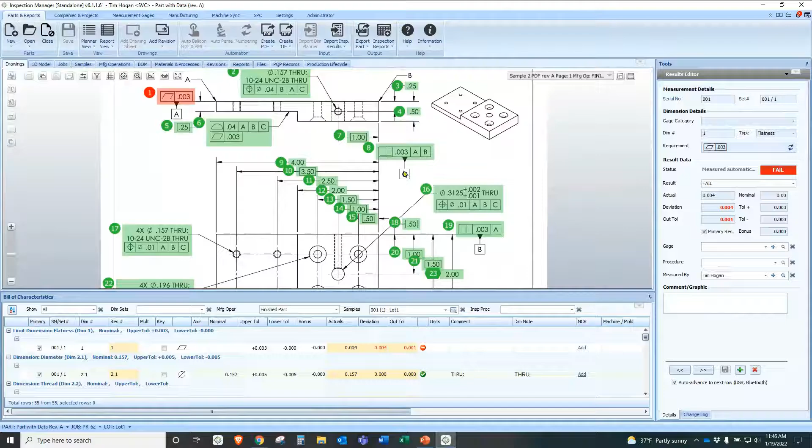That's about, I'm sorry, I'm trying to think of that. I think that's about all I have right now. We're a little early on time, so that's a good thing. So if we could turn it over to questions and answers.

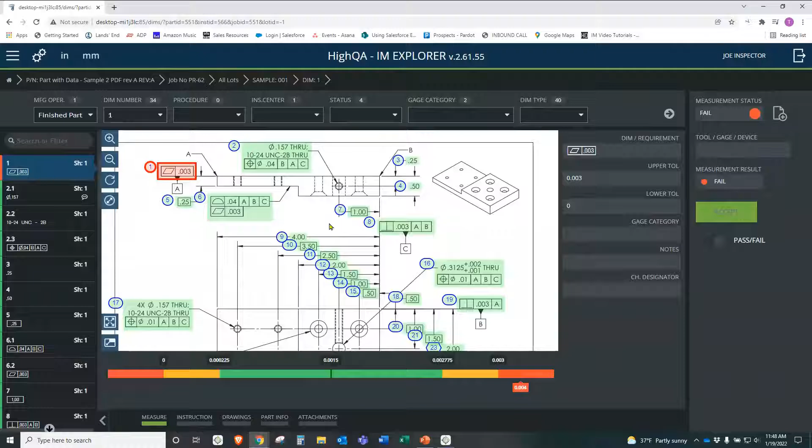Here's another question. When a measured result fails and an NCR is created, can a reason be added to the database as you work through this? Yes. As you saw when we did that, it automatically populated the, in fact, I can show you right here very quickly. Incidentally, side note, notice that I brought in the information in Inspection Manager from the CMM. Being we're a database-driven application, it's automatically been populated right in the shop floor as well. So again, it's real time going back and forth bidirectional. So it has all that information.

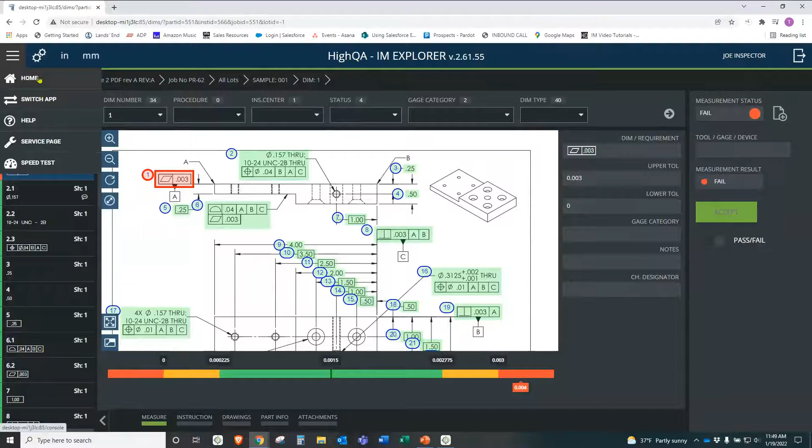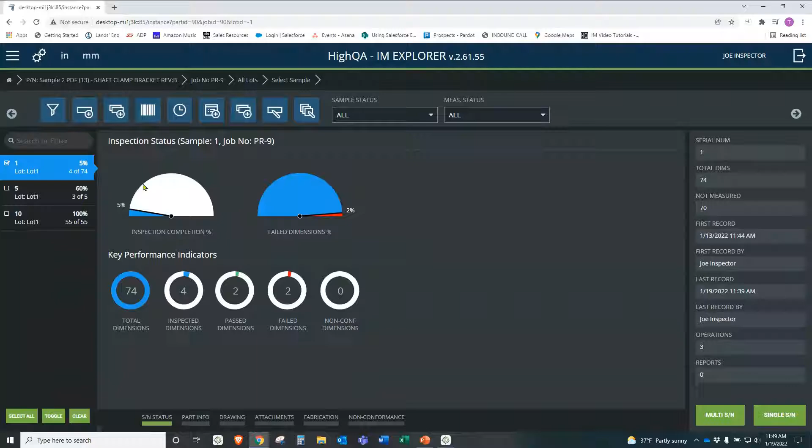But let's say it's, let me just show you very quickly where that is, for example. Pardon the delay. I'll just enter some bad information in here. So when the non-conformance pops up, and by the way, this is optional too, they could say, okay, I don't want to add one. But you can also click on add new. And so there's a couple different areas you can put.

So where can you put the information, the reason codes, if you will? Some people will put them in the comments right here and just identify them that way. But also, when you are changing the status here and you hit OK, it automatically pops up with a defect code. Now, this defect code can be changed to whatever you want it to be. If you have reason codes that are specific to you or a customer or whatever, you can populate this with whatever reason code makes sense to you and your industry and your company. So here's where you go in, put that reason code in there, hit OK, and then you're good to go. So that's where you would do that.

Okay, and I think we had someone just piggyback off this. Sure. So if a part fails, with failed parts, can they be broken down by reason for failure as you're looking at these reports? The data is available to do that, so we can run reports. This is not a full corrective action, all that good stuff.

Okay, but what we can also do is populate the NCRs up to like an ERP system that usually tracks corrective actions that way as well. So we didn't mean to get into the weeds in this, but we do have what's called an open API, and we can communicate with different software, especially like an ERP or a PLM system. So we have bidirectional communication capabilities with those, to where we can send information, feed information, back and forth with them, no matter what the information is.

So that's what a lot of our customers do, is they'll take the NCR that's generated and then, pardon the term, push it up to an ERP system to where it can be tracked there and corrective actions logged and tracked. And then we can also send that information once it's done in the ERP back down and close out the NCR within Inspection Manager. Other companies just want to, let's call it more simplistically, track them, and we can track the NCRs and identify them by reason codes. Yes.

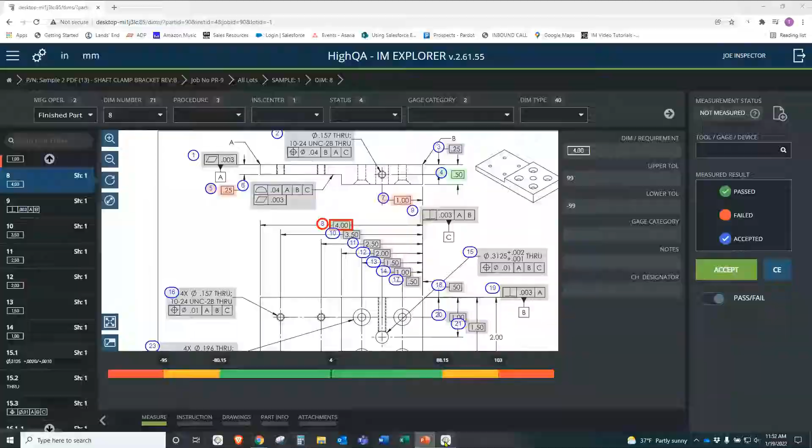Very good. Now I'm going to kind of summarize a couple questions that are related. We have a couple questions that are related to connecting your CMM to HighQA, and what does that data transport look like? Does HighQA assist with that, or what does that connection look like? Okay, outstanding question. So we have what's called automatic machine data transfer, or interface. Excuse me. It's called AMDI. We nicknamed it. Everything's an acronym.

But what that is, we're actually software agnostic. We don't care what software. We don't care what brand. We don't care what make, model, style, whatever. So what happens is your machine, whether it's a vision system, CMM, what have you, can output some type of file. Right? If you're running PC-DMIS, you're running Calypso, you're running whatever, you can output some type of file. We have what are called presets, and basically it's a way to define the way it's output from your CMM, and then we input that information.

Now that's a kind of a complicated way to say we have an interface that'll automatically bring in any file from any software. Very good. Well, let me qualify. I don't mean any file. It's some type of comma delimited file, some type of a delimited file that we can bring in. And again, we've worked with several. We work with Polyworks, Mitutoyo, all of the main ones, to be able to bring in any information.

And oversimplistically as well, we have a listening device. So imagine this: you have 12 CMMs, but you're all going to point that information to one file folder in your system. Well, we're simply listening for any file to hit that file folder, and we automatically bring that information in. Okay. So it's automated. Very good.

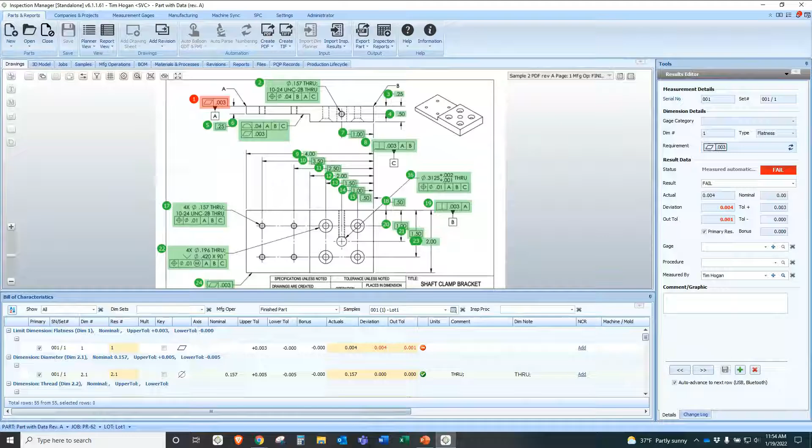We have a couple questions regarding software. So multiple users can be in this at the same time. Is that correct? Absolutely. Absolutely. Yeah. So we're not going to interfere with one another as we're on the shop floor and in the office and that sort of thing. Correct. Now, you could be working on the same file. That's very possible. Just like I was in the same file, and you see different things populated. So could you be in it and all of a sudden you have data? I mean, yeah, but that's the power of real-time information.

And just piggybacking off that, can this be accessed through a smartphone on the shop floor? Sure. Yep. Okay, that's what I thought, because we are running in a Chrome interface. Exactly. And literally, it's a Chrome browser. If you have something, you can open a Chrome browser and it's going to be there. Now, logic is going to hold true, right? How functionally can you enter information in on your phone? Well, that's another question. Sure.

Okay, I have a couple more broad questions. What functionality in the software do your customers see the quickest ROI? Oh, wow. That's a great question. That's kind of a big question. So let me unpack it a little bit. There's different levels of implementation, right? The first level of implementation is usually ballooning and setting up an inspection plan and gauge management and manufacturing operations and in-process check sheets. That's usually like the first implementation.